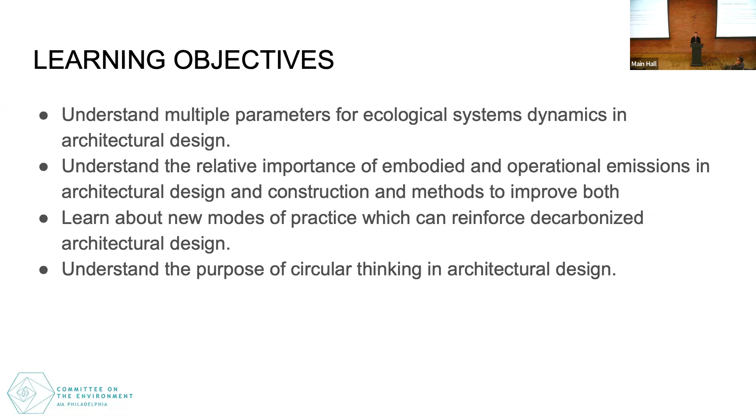The learning objectives for today are to understand multiple parameters for ecological systems, dynamics, and architectural design. Number two, understand the relative importance of embodied and operational emissions in architectural design and construction, and methods to improve both. Learn about new modes of practice which can reinforce decarbonized architectural design, and understand the purpose of circular thinking in architecture design.

Our presenter today, Timothy Locke, is a registered architect and management partner of OPAL Architects, a nationally recognized mid-size architectural firm in Belfast, Maine. OPAL is an acknowledged leader in sustainable, ecological, and high-performance building design, in both institutional and residential project typologies. OPAL has a reputation for integrating technology and innovation with energy and material lifecycle modeling. Furthermore, in 2019, OPAL Architects was one of 27 firms nationwide that met and exceeded the carbon emissions reduction target of the 2030 commitment.

In addition to his role at OPAL, Tim is heavily active in several AIA groups. He's on the board of directors for AIA Maine and co-chair of AIA Maine's Committee on the Environment. He also sits on the National Strategic Council as Maine's representative, has served on numerous juries, and has chaired the AIA National Zero Carbon Working Group. In his role as strategic counselor, Tim provided support and guidance to the White House Climate Policy Office as they released their new White House definition for zero emissions, which was also announced at last year's Greenbuild. Tim has traveled specifically down to Philly for this event, so please join me in giving him a warm welcome to Tim Locke.

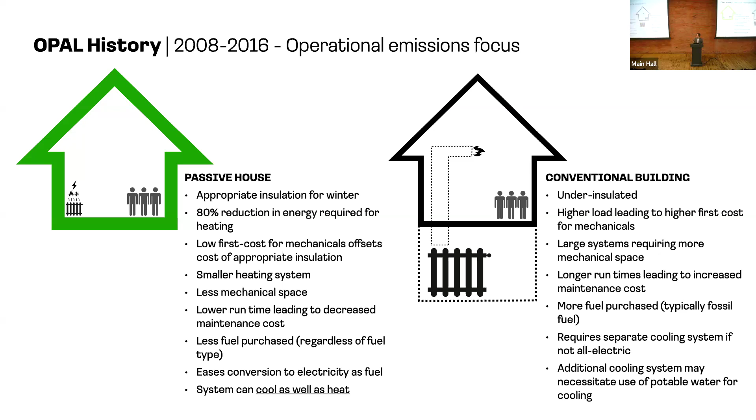Started with a really basic prototype. We actually got venture capital to build a passive house. This was the 12th passive house ever certified in the US, the first one in Maine, first one in all of New England. And we took a kind of outside the box approach to doing it. It's not very often that architects seek venture capital as though we were a startup.

This is how we did the first passive house. This was called the Go Home, back when we were still called GO Logic. We're not called that anymore. And that begat a kind of long lineage of small passive house typology buildings across the coast of Maine, New England, and beyond. We were kind of focusing on single family at that time.

I'm gonna try to go faster if I can, but we started to slowly adventure into different typologies. This is a lab that we did for University of Chicago about 10 years ago. We started to look at institutional buildings, things that were a little bit more difficult, but still applied the same paradigm to it.

The result of that, we can get to it. Slow slides, sorry. I'm really sorry about the lag here. I'm just trying to get it to catch up with where I am on my deck. You get to look at pretty pictures while we wait. Very sorry. Almost there, okay, here we go.

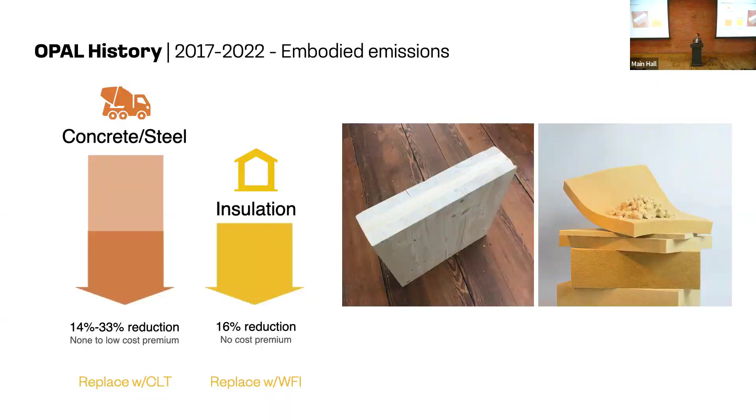We had to kind of expand into other territories. So about 5-6 years ago, 2017, we decided to take on full embodied emissions assessment in all of our projects. Could we take the same passive house approach of conservation to materials as well? That kind of led us to a turning point.

This is about 24 months ago, where I sat down and thought to myself, we're taking this piecemeal. But are we really looking at the whole picture of how we, as designers, are managing our system boundary?

One of my senior project managers had just finished his MBA at Sloan at MIT, and he was all excited about systems dynamics. I'm like, yeah, I wonder what we're doing on that as architects. Are we really asserting control over the system that we have control over, as in the design process for buildings?

I looked up this article that I try to read once every couple of years. It's a Donella Meadows article. She is a systems dynamics thinker, past at this point, and she has this amazing piece about places to intervene in a system. She's looking at any system - she was an environmentalist - but ranks these areas to intervene in a system from the least effective to the most effective. Twelve being the least effective, all the way down to one being the most effective.

It immediately struck a chord with me because I was picking up on these lines of inquiry that I knew were not working. So number 12, I've highlighted a few of them here: constants, parameters, and numbers such as subsidies, taxes, and standards. I was like, wow, we get frustrated all the time - like, why aren't the codes better? Why aren't our laws more stringent so we can do better buildings? I'm like, oh, it takes a really long time to change laws and we have no control over it. That's why it's a low level place to intervene.

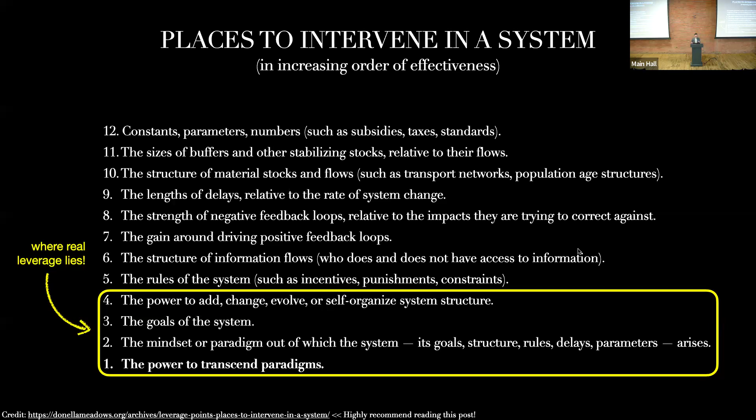I started realizing that the thing common to all of our practice in buildings was that we were operating in this area where we were just deciding to do things differently without asking permission. We were changing the system and self-organizing it around specific parameters like passive house or embodied emissions. We were changing the goals of the system, incentivizing ourselves to meet different targets than the discipline itself was choosing, and it was changing the mindset of our practice.

So developing a series of insights around that, working against the intuition and expanding our umbrella - that was the goal we had around this line of thinking in the last two years. So I'm going to share these insights with you. There's 8 of them, doesn't take too long.

First one is that our intuitions are often wrong. They're largely emotionally based - they still are great motivators, but first we need to ask ourselves what we actually know.

And I think the big one when we think about COTE, think about climate action, is this: save the planet. That is an intuition, that is not an insight. The planet is going to be just fine, the planet's gonna be okay. We're not gonna be fine, but the planet will be fine. So we need to think of ourselves as preservationists of humanity, of how we live on the planet, of the species that we interact with. The idea of saving the planet is a false intuition.

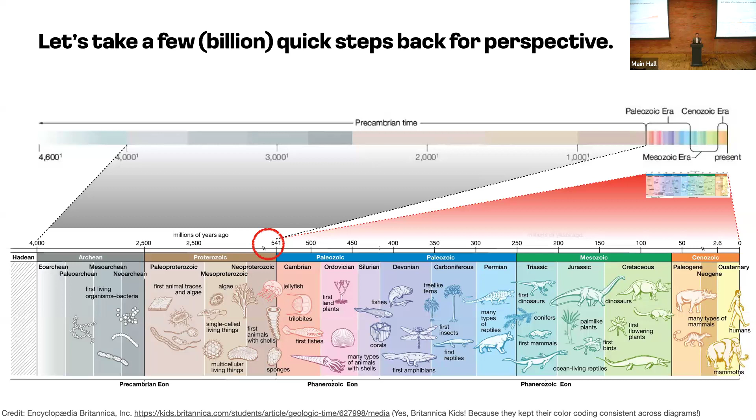We're really concerned about sea level rise, and we should be, because it affects us, it affects our habits, it affects the way we live. But we have to recognize that humans have lived through all of these conditions, and humans will continue to live through other conditions beyond where we are now. What we're trying to do is preserve that uncertainty, deal with that uncertainty. So climate change is about uncertainty, it's not necessarily about an existential crisis - so getting out of that mindset.

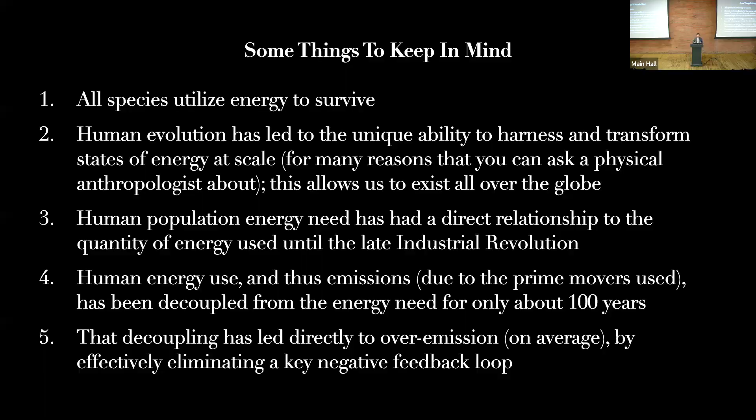That led us to this insight that an organization or civilization can only be sustainable if our renewable resources are used no faster than they regenerate, if disruptive pollution and waste are emitted no faster than they're broken down, and renewable resources have a timeline, non-renewable resources have a timeline to no longer be used at all.

It's pretty basic. We've got to use less stuff, period. We have to draw that down, whatever it is—energy, materials, no matter what. We're not great at that in the US. We use 5.1 Earth's worth of resources per person on average. We're not the worst, not even close, but it's nowhere near the one-to-one we need to be at to be sustainable.

I gotta hide this again.

We exist in a dynamic relationship with the natural world. This is our ecosystem. So we have a habit, especially in architecture—I think a lot of people know this picture, Laugier's primitive hut—of tying ourselves closely to humanity and thinking about architecture as a human intervention that's non-ecological, and then fretting about how ecological we can make our buildings. Well, we need to start thinking about them as part of our ecosystem.

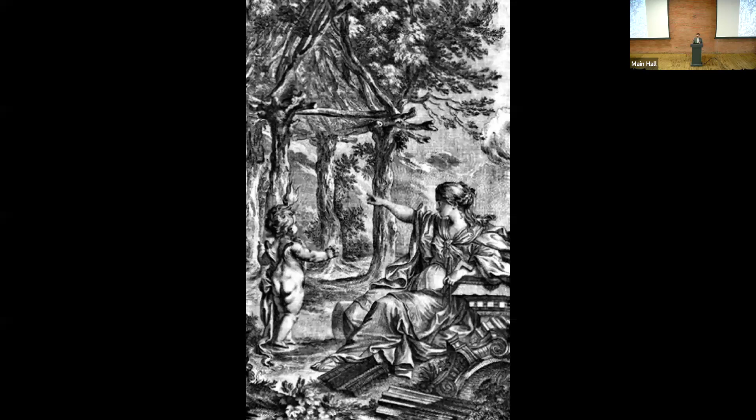Our ecosystem is all this stuff. It's all drawn from natural resources. We're not harvesting other planets. And so thinking about these things as separate is really just about idealism versus materialism.

We're trying to think about things as material at OPAL, always measure and calculate what those impacts are. And that definitely changes how we think about a building.

What's the limit of a building? We used to think about buildings as ending at four walls, and I think many people still think about them that way. It's pretty common now that we think about energy—energy comes in, waste, heat, and emissions come out. I think that 20 years of work on energy has kind of cemented that as core to most people's understanding of what a building does.

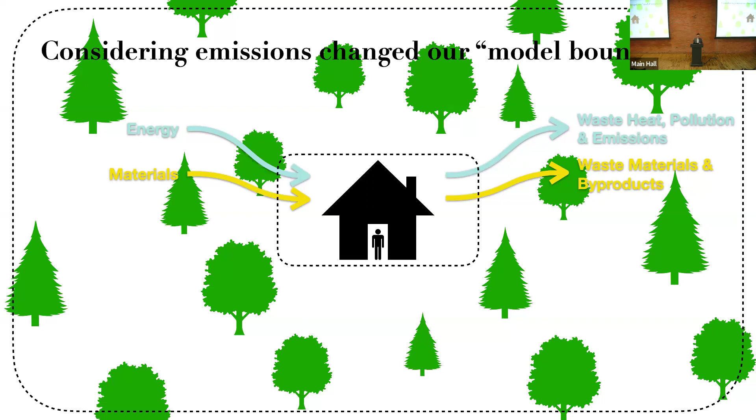But that boundary is quite tight. The first thing, considering total emissions—we already talked about that—changed our model boundaries a little bit. Now materials were part of that equation. Waste and byproducts of those materials, be it through demolition or replacement, were also part of that equation. But we still didn't see that as holistic enough if we're thinking about just using less stuff.

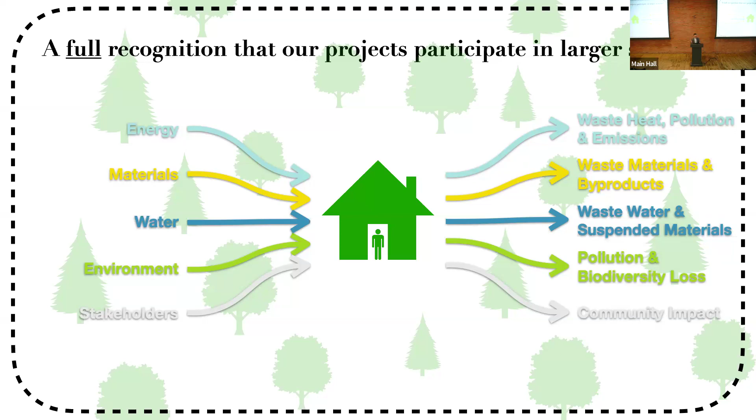So we were trying to look for a full recognition beyond just emissions that all of our projects participate in. We thought about energy, materials, water, the environment or ecosystem, and stakeholders—us. We're part of the ecosystem too, again, not editing us out. And those had different byproducts: waste and materials, water, wastewater, suspended materials, pollution, biodiversity loss, and community impact. We started thinking about our system as these five boundaries.

Once we'd established that, we were starting to really consider side effects pretty heavily. And again, there's no such thing as side effects, just effects that are outside of our thinking at the moment. We tend to be, as humans, pretty good open loop thinkers.

We can have a goal, we make decisions around the goal, that changes the state of the system we're in. Closed loop thinking is a little bit beyond that—it's like what we try to teach kids. You do these things, you learn from that change in the state of the system, and it might make you make a different decision next time.

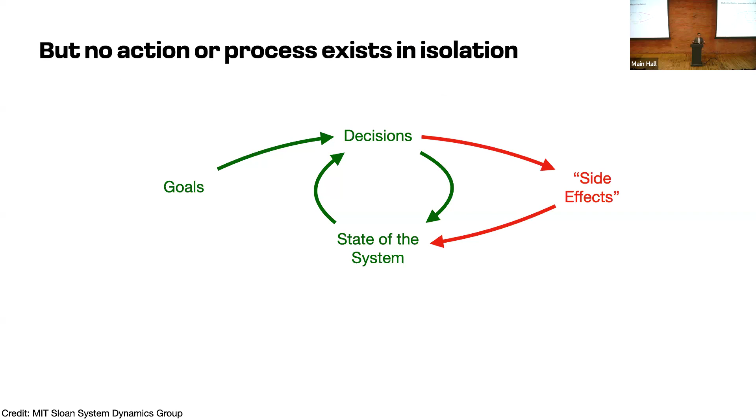But that's still not considering the side effects—what are the things that happen because of the decisions you make that are outside of your control? You deal with that a lot in life cycle analysis modeling or life cycle assessment modeling, relating that to energy. How do those things push and pull on each other? How are they not kept separate?

And then the thing I like to think about a lot is the other agents. There's a mirror of this diagram—there are people acting on the same system, an adversary to you, and they have their own set of goals that they consider equally important, with their own set of side effects. I like to go through this all the time, like the six potential opponents. I've made up six—I'm sure there are more—but I've categorized them as six to paradigm shifts.

We've all been on this list. 100% we've all been on this list. I know I've been on this list. It's important to just know that's out there, because they're all that mirror side of those system dynamics. There's the deniers—they're the ones that are in the news.

They have cultural hurdles and habitual hurdles to a shift to change. Resistant to change, there's plenty of people we know, practitioners, whose business as usual is working just fine for them for now. I'm not going to change. Hesitant to change, that's a fear response.

Governance structures, folks interested in maintaining their power, and a change in that system might affect that. Stakeholder allies, those have a potential financial burden with the change.

And then peer allies, this is the most interesting one in a group of architects or building professionals. We've all been peer allies to each other at one point or another, I'm sure, because of our own hierarchy of expertise, and trying to break those things down is really important, and understand that sometimes that's just an education and communication gap. And we don't want to use that list of potential adversaries to make an attribution error, to kind of start blaming other people in the system for things that we can control.

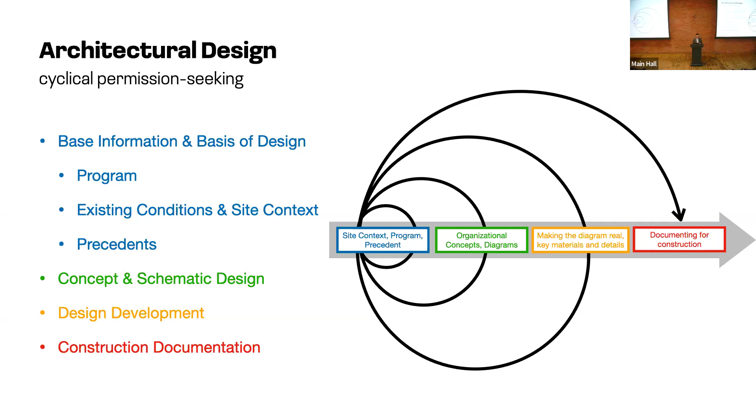And it was like, this is wild. If you were trying to permission seek on all these, you'd never get anything done. But you still have to model them, right? And I have to manage all that data.

And it got me thinking that, you know, we do all this modeling, but all our models are inherently wrong. They're fake. They're virtual models of something that we think will happen. We do the best we can. But really what I had to get people to do was ignore that giant, messy periodic table of criteria and think about a mental model about using less and doing more, being more impactful by doing that.

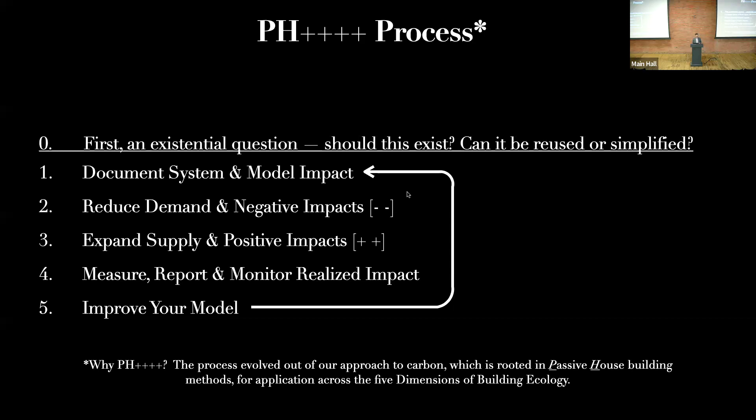The easy analogy here is: use less energy before you put the PV on the building, because you have much more effect of using less before you add more. Then we measure and report even after the building's open, use that to improve the model, cycle it back through, and do that across as many things as we can.

That allowed us to really break open the practice. We changed our name to OPAL six years ago, and we immediately realized that even an architectural practice founded around that idea wasn't enough. So now we have two sister companies that grew to leverage that idea across everything we'd consider the domain of something the architect could control.

So we have OPAL, not just doing architecture but doing holistic ecological consulting. We have Timber HP, making wood fiber insulation in Maine out of wood residuals from Maine sawmills, or any sawmills in New England—we'll buy your chips, doesn't matter where. And OPAL Build, which does mass timber component fabrication. All of a sudden we had a way to leverage experience and control of systems across components, materials, and advocacy.

I'm going to quickly give a brief description of each, and then we'll look at a couple of projects that synthesize those things together. First, starting with the holistic ecological consulting.

A lot of that's what I've been talking about already. It started with just taking that mess of a periodic table. We put together a building ecology squad—not just me, but George, Gabe, Dan, Karina, and Julia. Thank you so much, they did so much work on this over the course of 18 months.

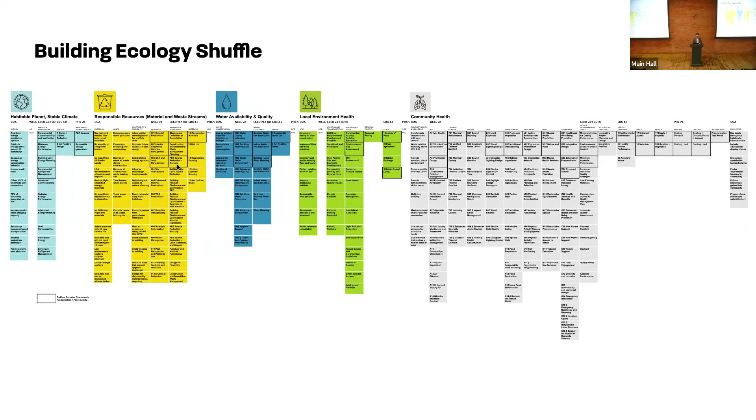We started by taking that crazy periodic table and sorting it into our five categories—the five categories of streams coming into the building. It's arbitrary, but we can make our own systems, right? We sorted them into these five categories. Still too much. Then we broke them down into things we actually thought the architect had direct control over on every project. Even this is too small.

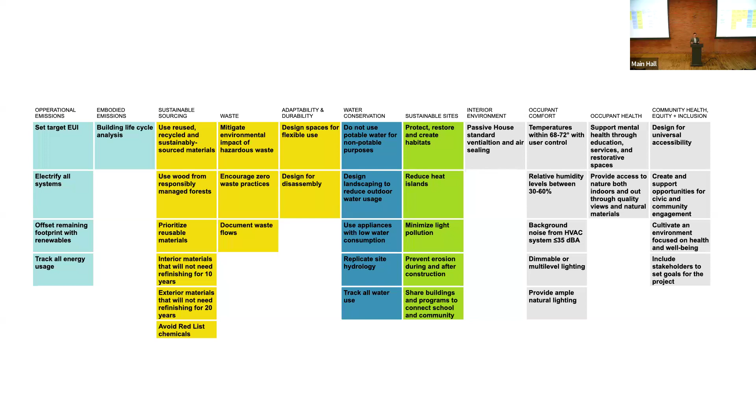I'm not even going to read them, because I wanted this distilled into things that actually have a design impact I can see, so it can be appealing to an owner, to a client. That was our dimensions of building ecology—that's how we consult, around this framework we developed internally.

We sorted it based on the scale of community affected. At the top, habitable planet, because it affects the entire globe. All the way at the bottom, healthy community, because it affects your stakeholders and their immediate community.

What we found when we did this was that the number of cohorts—especially in institutional projects, non-residential projects, larger projects—that found a way in through things that weren't building emissions up at the top was vast. Most people come in through the bottom, and that's fine. We all know these are interrelated, but they didn't need to know that. It was a chance for them to learn something, and it was exciting for everybody.

We sorted it into three key items in each category. As I said, I wanted them to have direct, visible design impact—something you could see with a design response, so there could be a social comparison, back to that idea of the cool factor. Then we put it together in a way that was digestible, always cluing in when it triggered another category.

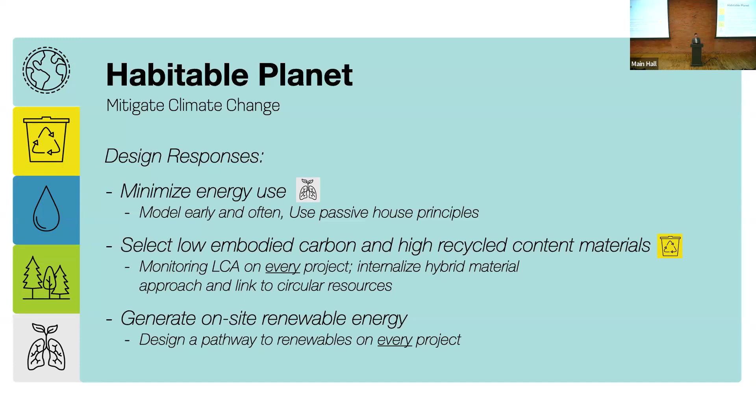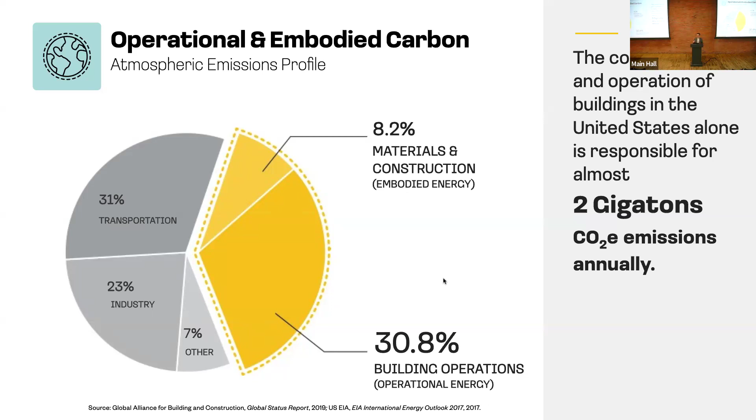So if we're minimizing energy use and not using fossil fuels, then we're going to have cleaner air in the building, which affects the community health part. People could start learning how things were interconnected as we went through it. Habitable Planet was obviously the first one—the one we're most experienced with, and still hierarchically probably most critical with buildings, because 40% of all global emissions come from the things that we do. They're the byproduct of our scope 3 emissions as architects.

I always like to do this when we travel—understand the difference of climate, because it changes everywhere we go. So standing here in Philly, you have a much less aggressively cold climate than we do, but more cooling, and a slightly dirtier, by about a third, energy profile. What it results in is actually a pretty similar opportunity, whether it's here or in Maine: reducing operational emissions is a significant way to reduce total emissions.

Pennsylvania's approach is driven more by the way you produce energy. Ours is driven more by the need for energy, but they come out pretty close to each other in the end.

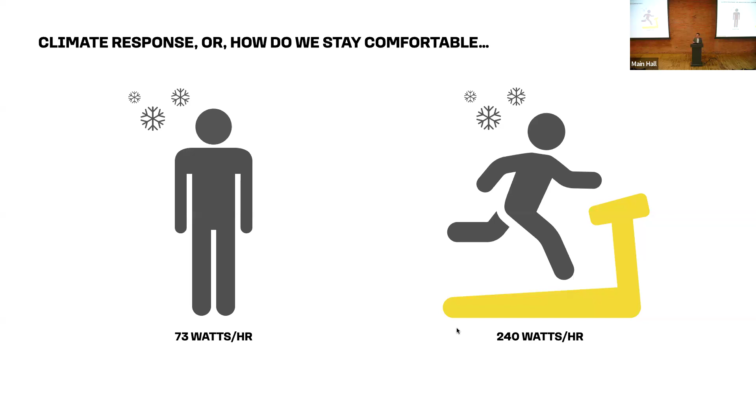So climate response is just staying comfortable, right? Like if we're standing outside in the cold, one way to stay comfortable is I can produce 240 watts an hour. I don't know if there's any other runners in the room, but I can read that now on apps or on my watch. I can tell that I'm warm. I can wear way less clothes if I'm outside. If I'm standing still, I'm going to be cold. But there's a pretty easy way to deal with that.

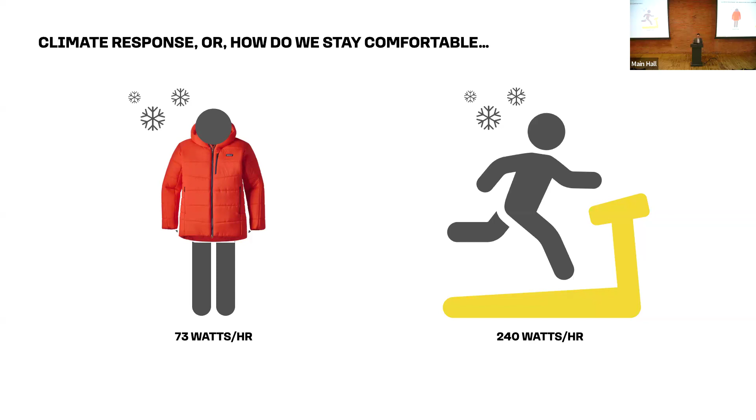We can all wear a passive house every day just by wearing the right jacket. That's that passive house. But if you continue to run, maybe you break your knee, maybe you're going to be pretty angry pretty quickly, and your body's going to break down.

And basically throughout northern North America, that's what we've been asking our buildings to do. This here on the right, basically for all of modernity, that's what we've been doing ever since we decoupled energy from population. A hundred years ago, we've been asking our buildings to do that. No wonder they break down and they have to get replaced. No wonder we're replacing our mechanical systems every 25 years.

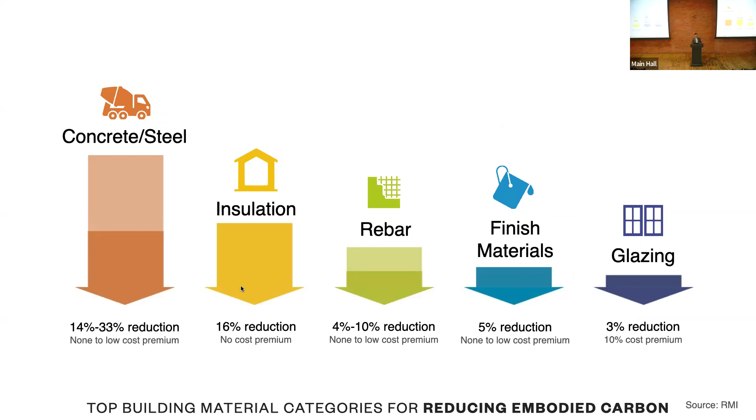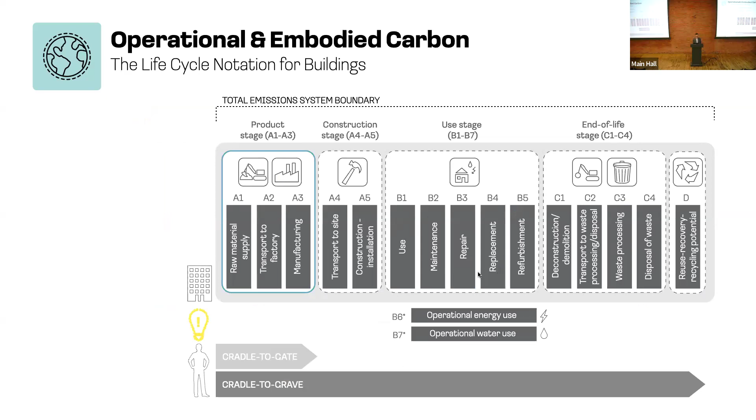We also want to look at embodied emissions, of course, reduce what we can, focusing mainly on insulation, concrete, and steel, because they're the biggest contributors across most life cycle assessments. Looking very specifically about total emissions, trying to be inclusive and exhaustive, we've recently, in the last year or so, started adding modules to this, like refrigerants and mechanical systems, into our total emissions boundary on that habitable climate section.

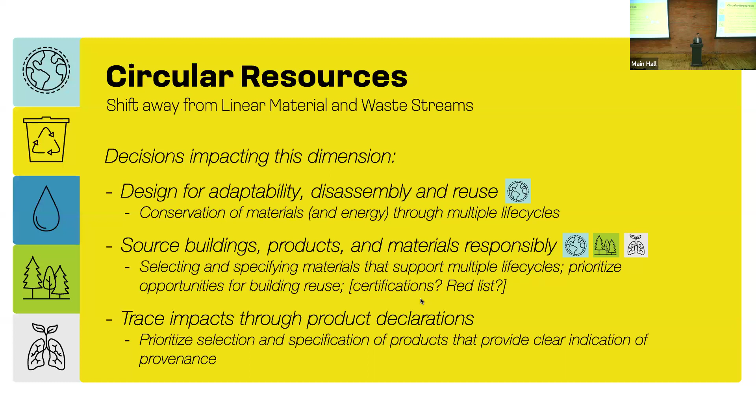Circular resource is something that I've become really interested in lately as well. The benefits potentially in reducing emissions by being circular, by designing for adaptability, by sourcing buildings and products responsibly, and by tracing impacts. This comes largely out of the Ellen MacArthur Foundation thinking about circularity. But I love this little graphic. This is actually something that a colleague of mine at Rocky Mountain Institute shared with me when we did a lecture together a few months back, that I thought was just brilliant.

If we really want to be circular as designers, we're going to have to think really hard about the way we design. The reason I'm so interested in circularity right now is because it has the potential to change the design paradigm.

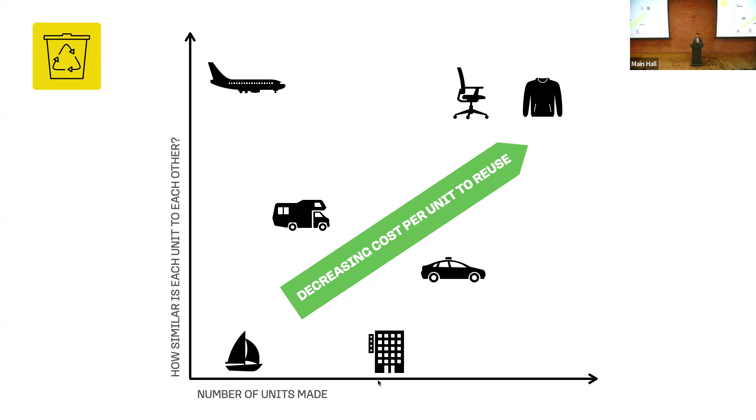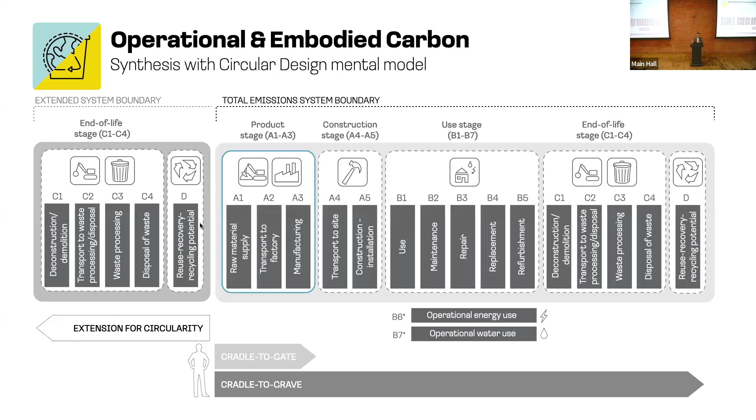Well, people that are thinking circular are not only going all the way to the end of life, but they're already going back into a past life of a previous building and thinking about essentially, I mean, I'm not trying to be glib, a multiverse of buildings, imagining these multiple lifespans of buildings overlapping each other constantly. And it's really interesting because it's basically taking this thing that we all know as practitioners and turning it on its head to this thing where everything's interconnected. The demolition of a building can feed directly into the construction of another one.

When you start thinking about that way, to allow that to happen easily, some things start to trigger, like, maybe we don't want bearing walls in buildings because that means we have to take them all the way down if we want to change the space. Maybe we want really regular and long spans as often as possible because it makes things more flexible, which means the propensity for it being torn down is lower.

New questions. We talk about water use, and also just our conceptions of what we think about as zero water. And are we actually doing that, or are we changing the dynamics of the hydrology of our regions in ways that we can't walk back from?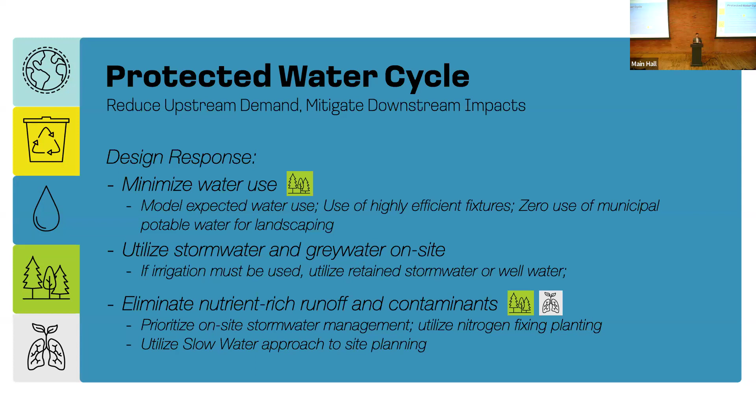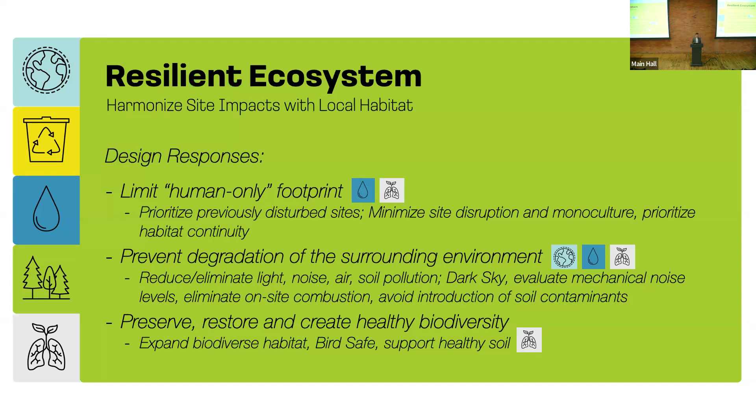Resilient ecosystems - we want to always limit the human-only footprint as much as possible. We've started calling it that. So that means it's not just the building that's human-only, but also lawn, driveways, things like that, and trying to minimize that as much as possible. We've had the luxury with some projects on the coast of Maine where we can do that. We can build buildings on tiny piers that don't actually affect the surface at all, and the biodiversity can stay much higher.

That's not the case everywhere, and ecosystems are different everywhere, and that has to be acknowledged. And then healthy community - that's the one I think most people know well, even as stakeholders, and they know what they want out of those buildings. We had an opportunity of doing a project, we'll look at it later, where their entire reason for doing the project was just about making their campus ADA accessible. We were able to do this really confined building to make that happen and still meet their emissions goals as well.

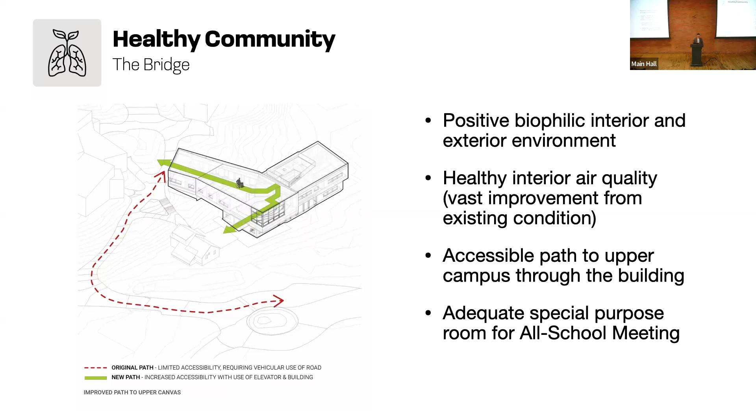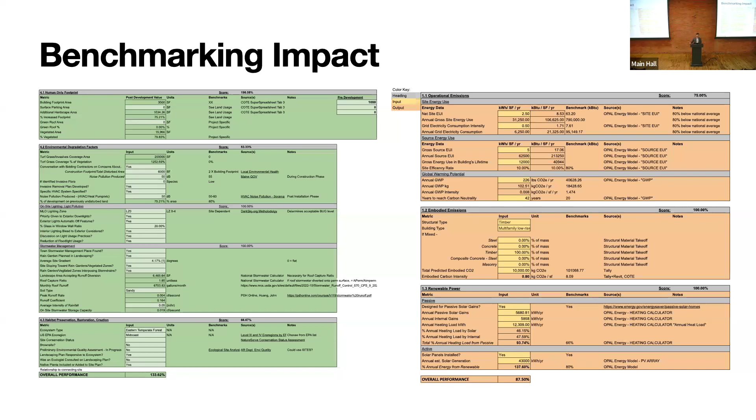So we put this all together and we have a benchmarking tool. We built this in-house. It uses a lot of inputs and formulas from other tools. We're trying to always reference that within our tool, like when people need to use other ones to fill it out, but it's a way to set benchmarks for the office. Since Passive House had always set its goal of 80% energy reduction, we're like, can we get to 80% reduction in use across all 5 of those categories? I don't know yet. We've only been doing this for about a year. So far, we haven't done a building yet that got to 80% in all 5 of them, but we'll try, just keep trying it.

And then this also means advocating. It means being here today with you. It means working with the White House on policy. It means starting things just off the cuff. We started a Maine Mass Timber Collective just last month through our COTE chapter to try to raise the baseline standards of care for biogenic structures, not waiting to be told that there's a set point by the industry, but setting it ourselves. So that's for consulting.

We're also making wood fiber insulation. So we did a crazy thing like 6 years ago where we bought an old paper mill and we bought a bunch of wood fiber insulation making equipment from Germany, in a plant that was closing down because they were transitioning to making MDF for IKEA. They'd gotten a big contract.

Well, it turns out that you make wood fiber insulation the same way you make MDF, you just don't press it as hard. And it also turns out that as we start to super insulate more and more buildings around the country, people need a lot of insulation. And this became quite quickly a really exciting business proposition for a lot of investors.

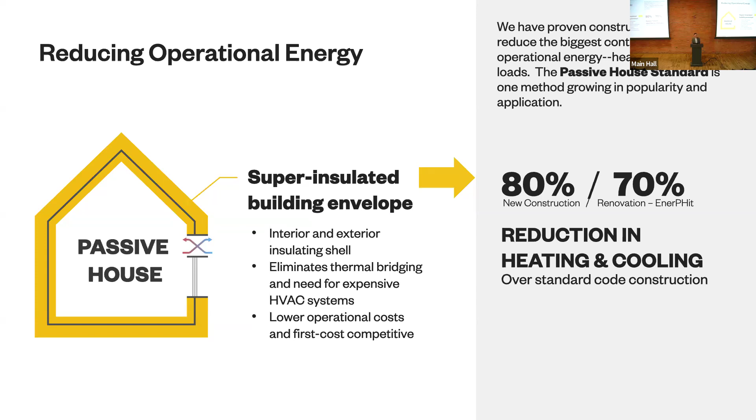And all of a sudden, there we were trying to design a factory, which we learned immediately we should not be doing. We thought we could, and we can't. But the potential was huge in reducing that embodied carbon because the insulation products that are available on the market are quite high in embodied emissions, and there wasn't really any good, readily available and readily scalable biogenic solutions.

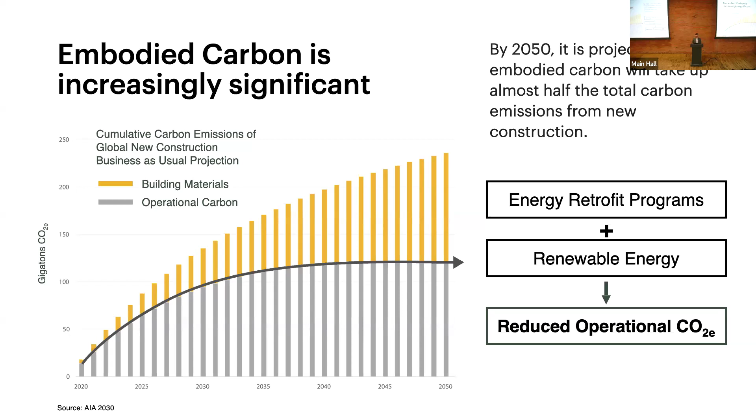Measuring A1 through A3 on embodied emissions, it's the only insulation product that can show a negative. We do include biogenic carbon - we can talk about that after potentially. I know there's a lot of debate about whether it should be included or not. I think we would advocate that it should, not just because of TimberHP, but for a lot of reasons. It's a waste product too, like it fits in with that circularity. So when a sawmill makes lumber out of a log, there's a lot of chips.

We call them residuals. If they pile up at a sawmill—we have a lot of sawmills in Maine—it can shut that sawmill down in 3 days if no one buys them. No one's buying them for paper anymore, or very few people are. So if there's a waste stream that can be put to good use and also store carbon in a building, that's a pretty exciting opportunity, and it helps us revive our forest economy.

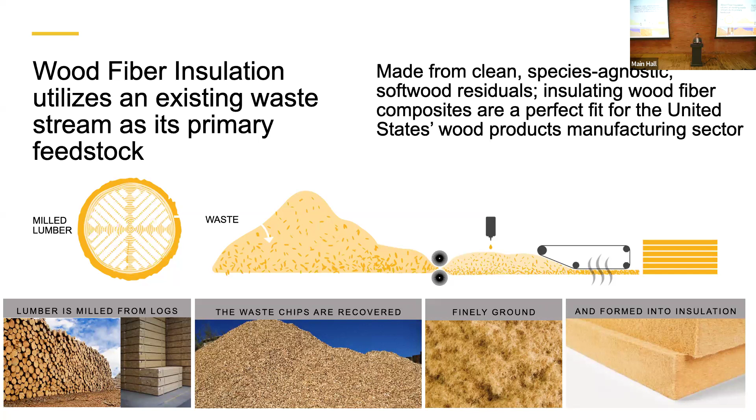With the decline of paper production, those wood baskets are kind of going unused, and we have different problems in different areas. In New England, it's the potential closure of family-owned sawmills. On the West Coast, it's topped trees that can't be used for lumber sitting in forests and starting forest fires. There's different problems in different regions, and there are also untapped regions that don't have the forestry industry they once did.

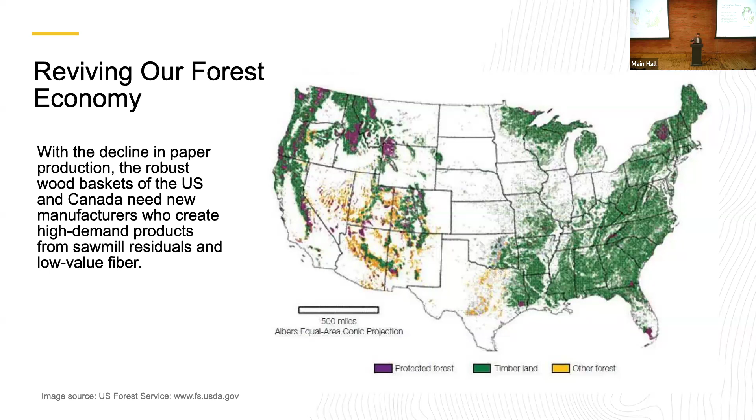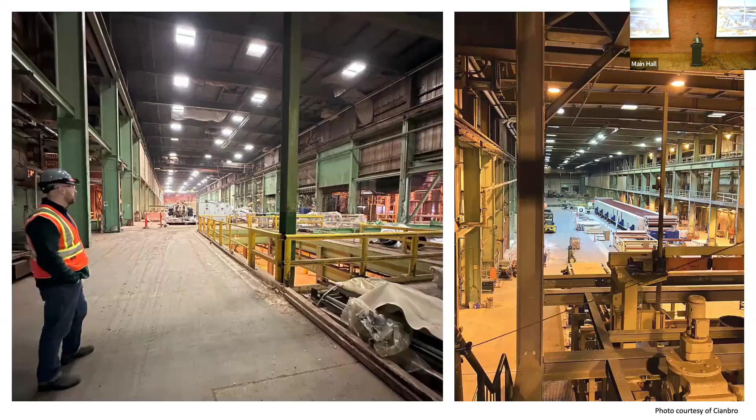Here's a view of the inside of the first production line getting installed. It allows us to create wall systems that can save considerable amounts of CO2 in A1 through A3 over mineral wool, which was the product we'd been using most extensively before that.

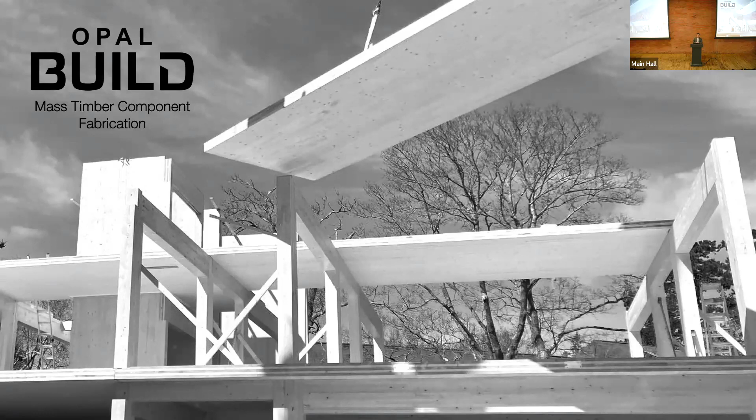We also created a mass timber component fabrication shop—this is in Belfast as well. The insulation plant is in central Maine. As we started to realize there was going to be this market for insulation and this extreme interest in biogenic materials for structure—mass timber, CLT and glulams—why not start a component shop that could combine the two?

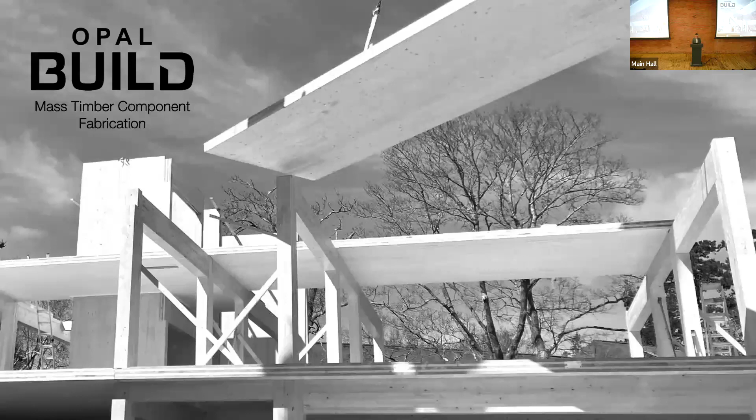This is only about 2.5 to 3 years old, but they've already erected a full CLT point-loaded building—that's this building here, we'll look at it later. They've also done an erection of a completely panelized all-wood wall system from a crane on a barge. This was a site that was inaccessible by road.

It's a field research station with a flowing seawater lab in it, studying marine life that exists in this one location in Penobscot Bay in the entire world—a specific type of scallop. Because of that, it's completely off-grid. The Science Foundation is completely off-grid, no cars. All their energy is produced on the island.

And how do you build a building that way? Well, there's two ways. You can deliver a bunch of sticks to the shore and put it together with a screw gun, or you can fabricate all these panels in the shop and crane them into place. This took 2 weeks to put the entire thing together, instead of a crew having to live on the island the entire summer. So it saved them time.

And they also got this super cool CLT and mass timber all-wood panel. Here's some roof panels going in—that's a 3.5-inch, 3-ply CLT panel with 14 inches of wood fiber insulation laminated to it. The lamination happens in the shop in Belfast, and then it gets craned into place by the crew. Wall panels have slightly less insulation, but essentially you're getting a passive house level building, all CLT, all wood.

Simple building. We love simple buildings for case studies because there's a really good chance people actually do them. Don't try to break the wheel and also make the most complicated structure at the same time, because there's a high likelihood the building never gets built.

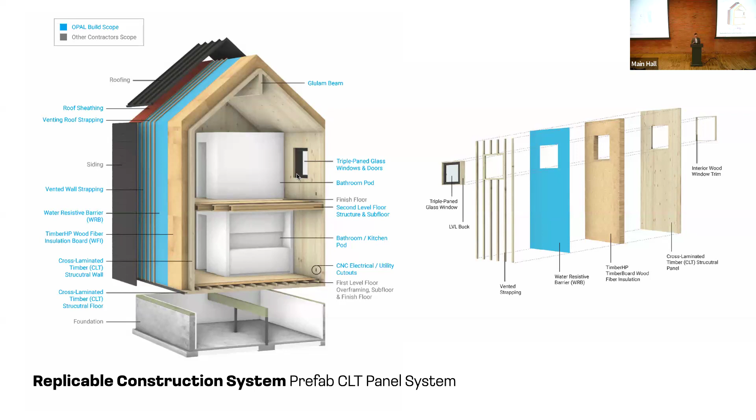All mass timber, all wood fiber. And we can also use it for other components, like retrofit window installs for deep energy retrofits. There's a big need for that across the country, especially if we're looking to be more circular. We need to find ways to use carbon storing materials for those retrofits and not just put a lot of foam on our buildings.

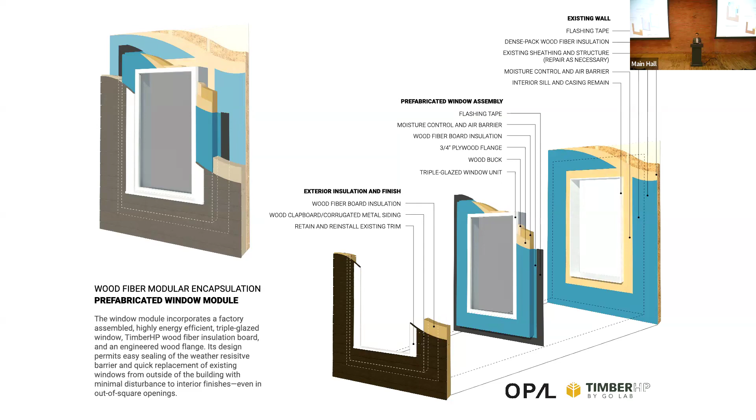So then we get to synthesizing that. We want to synthesize all three of those approaches together into architecture, because I was telling Roshni beforehand, I'm still just an architect. I like to think about these things, like to pretend to be a bit of a theorist now and then, but I still spend most of my day just doing architecture, and I love it. So I'm always interested in how do we take what we're learning and make it into something more.

I'm just going to share three projects quickly. The first is a school that we finished during the pandemic for the Waring School in Beverly, Mass, about 20 minutes outside of Boston. This school came to us with this really serious problem. They had no space. They have this all-school meeting every day. It's a private high school, and they were stuffing their entire student body into this room. There was so much CO2 buildup in the room that people were literally falling asleep.

They didn't even realize that was the problem they were trying to solve. They asked us to solve an ADA issue and that they really wanted to be the first certified passive house school in Massachusetts. And then we go to this meeting and we're seeing kids fall asleep in front of our eyes. Like, well, we're going to solve this problem with another method for you. Getting fresh air into the building, getting properly sized spaces are going to solve it for you.

They had this pretty significant grade issue, 11 feet between lower campus and upper campus. And the only way a wheelchair bound participant could get from the entry court to upper campus was literally to be driven, even though it was probably only 150 feet horizontally from one location to the other.

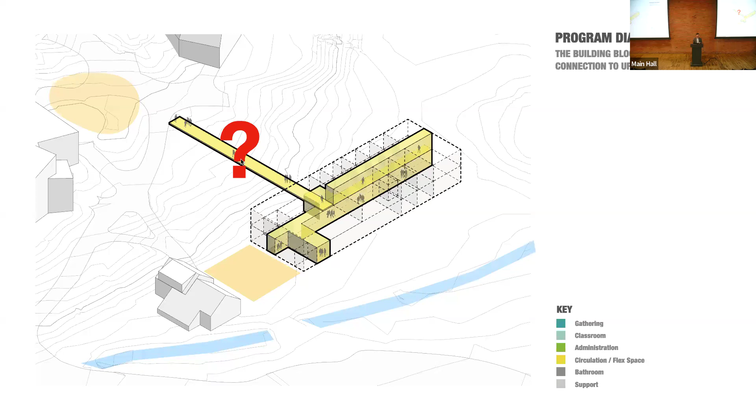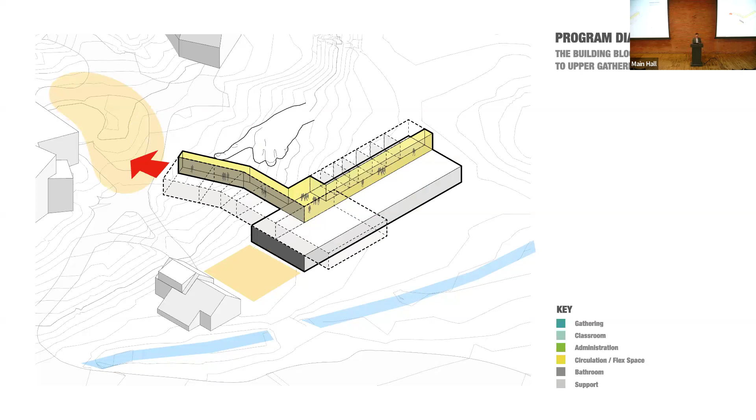We're like, we'll get you your passive house and we'll let the building be the bridge and we'll figure it out. It's not going to be a cube, but we've learned it doesn't have to be a cube all the time and we can still hit the number. So we used the building as the bridge. The second floor of the building became the thing that got those participants from that lower court to the upper court, completely enclosed, completely covered, very easy, accessible. And we were able to, somehow still not totally sure how, get the energy levels down low enough to meet that passive house goal.

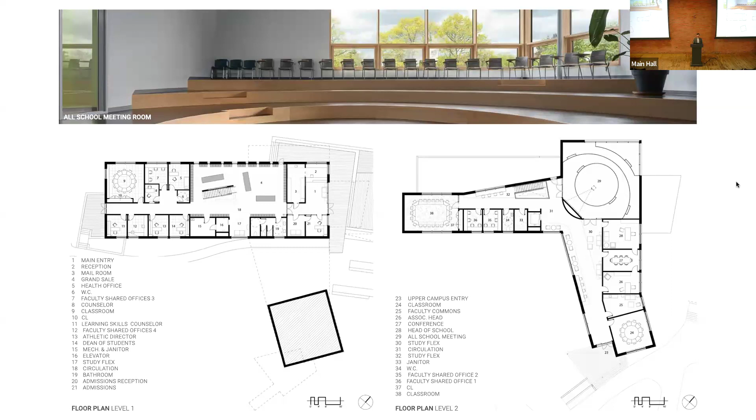The building had to be very contorted and convoluted to get around all the trees. We're trying to avoid a very restrictive covenant within Massachusetts about tree removal, which we fully supported, but it was also incredibly difficult. So some of the building's angles and contortions were just about missing some very, very large eastern white pines. You can see them through the window right there. So the bridge extends out, we had to snake past through those trees. Somehow our builder was able to do that without damaging any of those trees, which is amazing.

And we did this all for $325 a square foot too. So certified passive house, solve those problems, low cost, by investing in the parts of the building that they needed to make those things happen and not in other parts.

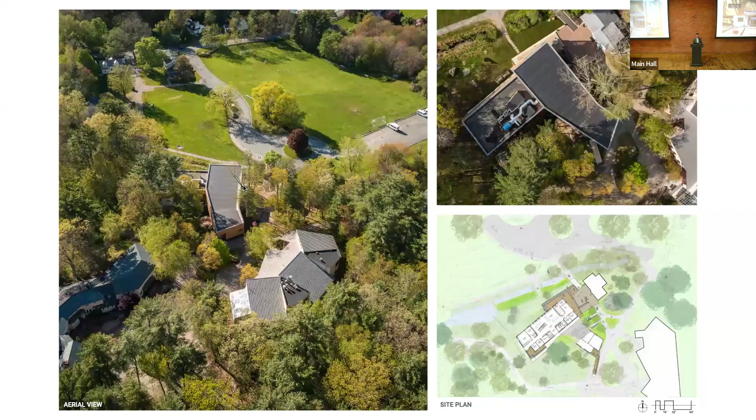Here you can kind of see back under the bridge. You can see from these aerials how that form takes shape, trying to get it through those trees, sculpting through there down to the lower court.

And all of a sudden they could breathe in their all-school meeting room. They had this new room that was the right size, completely supplied with 100% fresh air, with full energy recovery, passive house certified ventilation system. Because we knew this room always had to house the whole school, we didn't have to super increase the ventilation values, because we could just move the ventilation from serving the classrooms to serving this room as occupants move around the building, which was exciting, so they didn't end up with two duplicate systems.

The total modeled site EUI on that building was 5.7 kBtu per square foot per year. Typical educational EUI, I don't know what the average is now, but probably around 70-75 for K-12. Measured after one year, we always want to go back and make sure we're measuring it. After one year, we were at 8, so a little above, but still well below passive house threshold, which was our target. We're still waiting on the final paperwork from Germany on the certification, but the design has been approved. There's a couple construction details they're still approving in Germany, but exciting project.

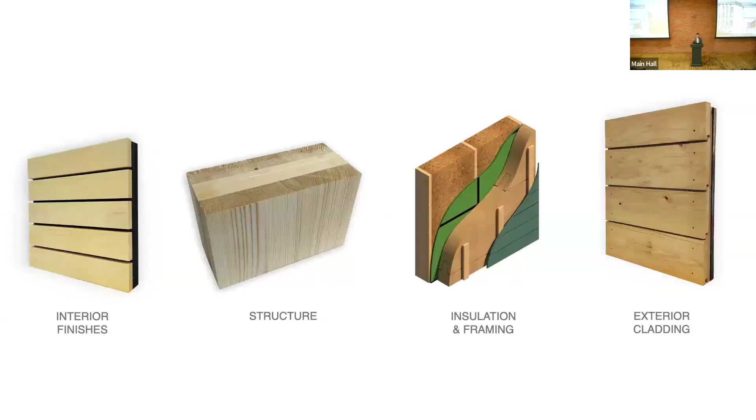This was way back in 2018. We couldn't source full CLT, but we could do glulams and the full wood wall system we'd looked at earlier. They also had really aggressive standards around habitat, so they were an early case study project for Ornilux bird-safe glass, used throughout the project.

They also had really, really aggressive stormwater standards, which you can't even see, but it was amazing. There's no public stormwater in Bar Harbor, so we had to deal with that no matter what. It was an exciting challenge.

The other big thing with this project is they had two rooms that go above hospital level in air changes per hour. They have a marine mammal dissection lab right here. Hospitals usually are in the neighborhood of 6 to 7 air changes per hour. Marine mammals, because of potential pathogens and dead mammals, require 12 air changes per hour.

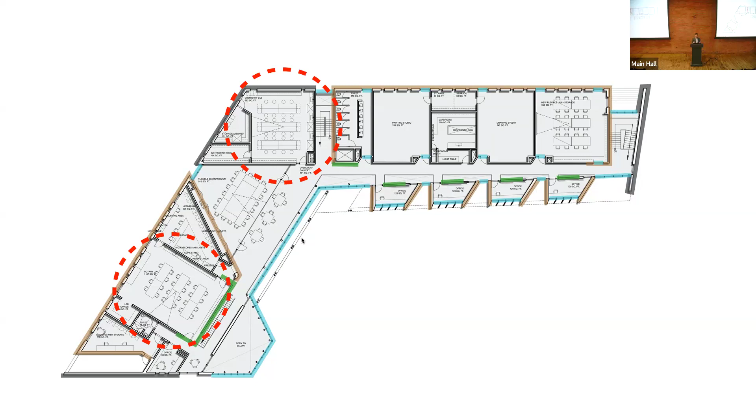When we saw that, we needed a system that could ramp that high and still serve general classrooms, because they also had a drawing studio with just a normal open classroom, a GIS lab with just a bunch of computers, and a printmaking studio with chemicals requiring very high air changes per hour. We needed a system that could do all that and still perform at passive house level, since that was their energy use goal.

When we did the modeling, the ventilation system alone was 40% of their energy loss. Usually, even with 100% fresh outdoor air, we're in the neighborhood of 25-30%. This was enormous. So we worked with a mechanical engineer, Van Zelm out of Connecticut, to custom design that giant DOAS ERV and custom design the enthalpy wheel to try to get something efficient across all those different modulations.

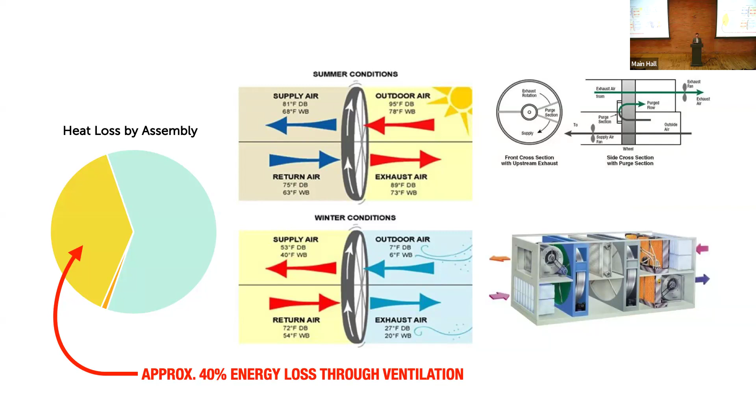The bird-safe glazing was a really exciting product to start using as well. We've now looked at that on a couple projects with them; we'll see a different version of that later. Getting a commercial contractor used to building a school at this scale entirely in wood was a pretty significant challenge too. I think eventually they got into it, but at first they were pretty wary of not having a steel erector on site at all.

Just some images of the building.

We're like, trust me, the amount of air that you're taking out of this room is already high enough. You don't need a vent right at the tanks, and you don't need it to go outside. We want to use that heat, temper it, filter it, and use it to heat the rest of the building. She's like, no, I know I need it. I know I need it.

So what we did was we just took one of the return air ducts and custom built a little hood. It still goes into the ERV, but now there's a boost switch that she feels like she can hear, the fan's going higher. And so everybody was happy.

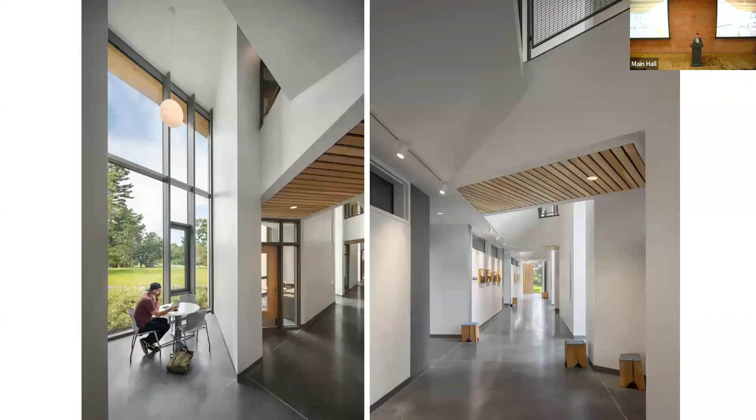It was great. But just some views down the hallway, again, trying to lean into the wood wherever we can on the project. All these stools were made by the college president from a white pine that had to get removed during construction. He hand carved the names of all the donors, and myself and Susie, into each one of the stools. So everybody has their stool in the building. That helped make the building such a really nice thing, kind of a cool little side thing.

This, I think, is like the nicest bathroom in Maine. If you're ever in Bar Harbor, you can send me an email and we can go look at it. It's really nice. And we were able to hit their targets on EUI. Their goal was 24 kBtu per square foot per year. We got it to 11.

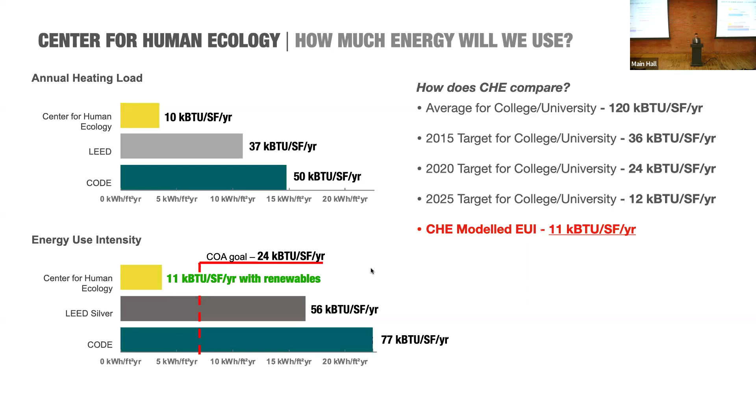They were having this long debate about the night bus, about whether they should buy an electrified night bus. And what we were able to show them is, you can do that, it's great, you should. But also, by the way, the deferred emissions would allow you to run the same night bus you have for 355 years. So maybe let's consider where we're putting our investment. And that was a fun day for them.

Again, we try to measure this one as well. This one actually has come in, after a year of operations, under our model, the EUI—so we're at 10 kBtu per square foot per year—on an academic building that has collegiate labs, collegiate printmaking, a chemistry lab, a zoology lab within the building. So this is a real lesson for us, that those passive house approaches are possible. Those low embodied emissions are possible in any building type, no matter what convention is.

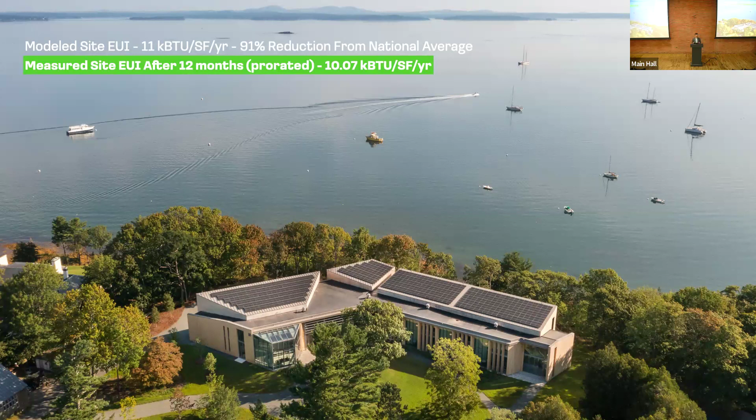So the last one I'm going to share is a second building that we're just finishing now for College of the Atlantic, that I call Lifespan. It's a dorm. Right after we finished that building, literally a week after, we did the ribbon cutting at Convocation—this was in 2021 for the building you just saw. The college president calls me—I don't know, for those of you who do residential architecture, sometimes you have a client that gets done with their project and they just want to do another project because they just love it, they just love doing it. And Darron calls me, he's like, I want to do another building.

And I'm like, really? We just finished. He's like, yeah, but I want to do all the things we couldn't do in the other one, because we couldn't buy the stuff yet. And I was like, all right, let's do it. This one wasn't a collaboration, and it was on this crazy tight site.

The interesting thing about College of the Atlantic is that it's 8 old vacation properties from the turn of the 1900s that they bought. So there are all these footprints of buildings that used to be, and the outbuildings and accessory bits of human imprint that used to be.

The site they chose was completely within a tennis court that used to be there. The ground had been leveled, a previously disturbed site. The challenge was, can you fit this entire building within the limits of that old tennis court? You could only see the residuals of it, they weren't still playing tennis there, it's from 100 years ago.

So it's a very compact building, but it allowed us to try something interesting I was interested in, around creating a building that could potentially see another life as a non-residential building. They wanted to do all mass timber. Unlike the other one that was a hybrid, they wanted to go full CLT on this.

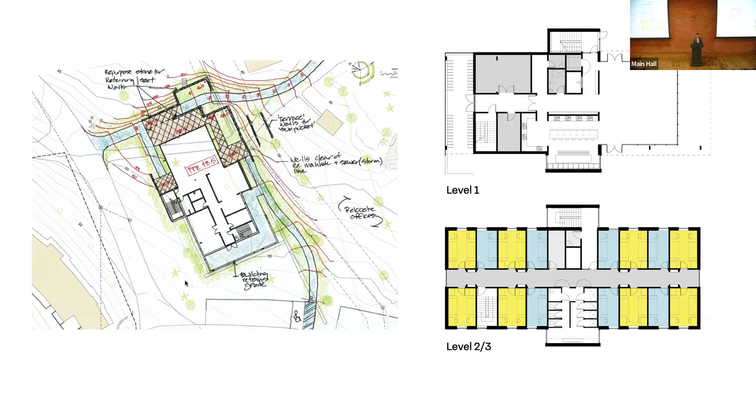So we developed a layout that would be conducive to potential reuse, no bearing walls, all glue lam posts with CLT spanning across multiple bays. Obviously dormitory typology is really conducive for that, but I wanted the potential for all those demising walls to at some point be knocked down, to use the building as something else if you had to. So CLT was like thinking about Maison Domino, but with glue lams and CLT. That was kind of what I was trying to instill into our structural engineer, Thornton Tomasetti.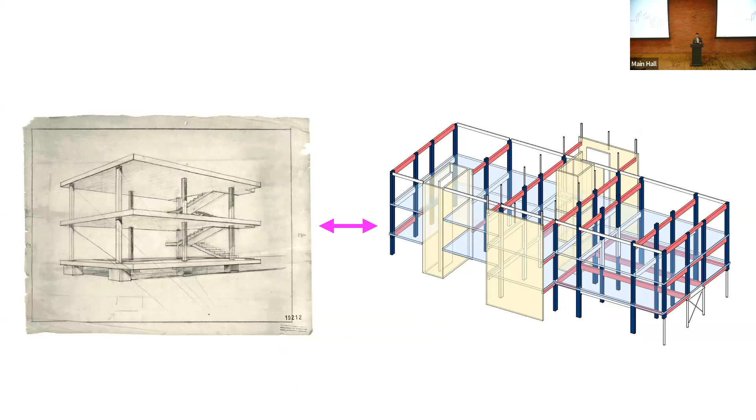We're kind of inventing a lot of these fasteners, because if any of you have done mass timber projects, you know we're at toddler phase right now. Everybody wants to do it, it's on every project, it's so popular, but a lot of these details don't exist. Even for basic layouts, like the most basic glulam layout you could possibly do, if this were a steel building I'm sure they could have detailed it in a week, but all of these details had to be custom drawn, custom fabricated. This is the hurdle for mass timber. So everybody who's super excited about mass timber, understand that. And it is in the process of getting built into your cost, trust me, it's an issue. Even with insurance, people are getting wise to this being a fad, so warning.

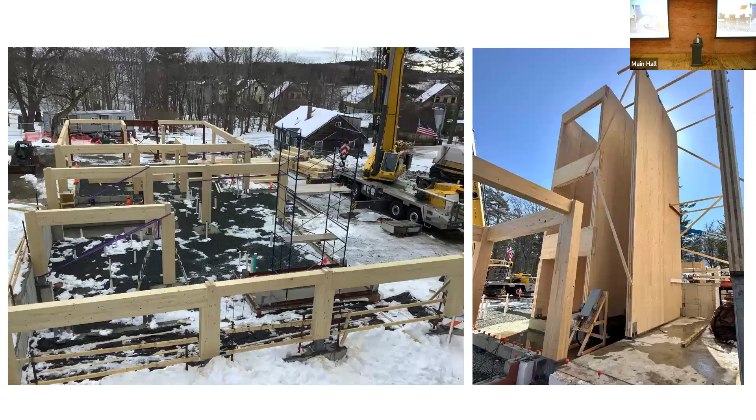So here's our layout. As I said, OPAL Build did the erection of this building. We tried to go out to other competitors, but the only people that even responded to the ask from the construction manager to install the CLT were steel fabricators, and then all of them disappeared when they actually needed to provide a proposal. So only OPAL Build was able to do it in our region, and they put this entire building up in 3 weeks.

The mass timber came from Austria, in this case KLH, and got delivered in shipping containers. The erection of the mass timber took 3 weeks to top out. It's a 3-story building, and they spent another 3 weeks on site just installing the roof trusses. That's the difference between these large systems that can be craned into place versus the way we typically think of wood construction. Here's the crew, special shout out to Dave Miller, our site superintendent.

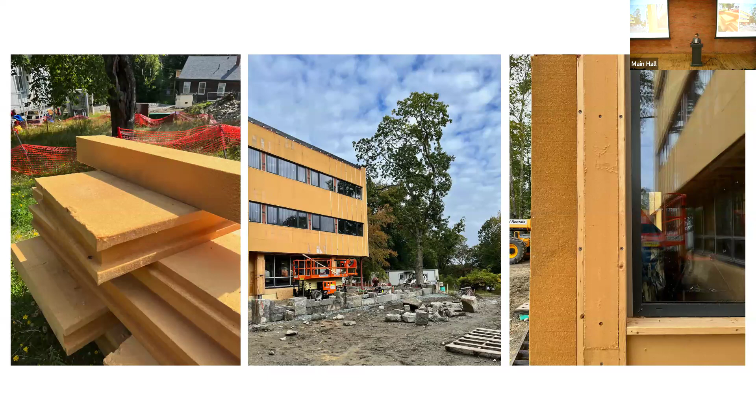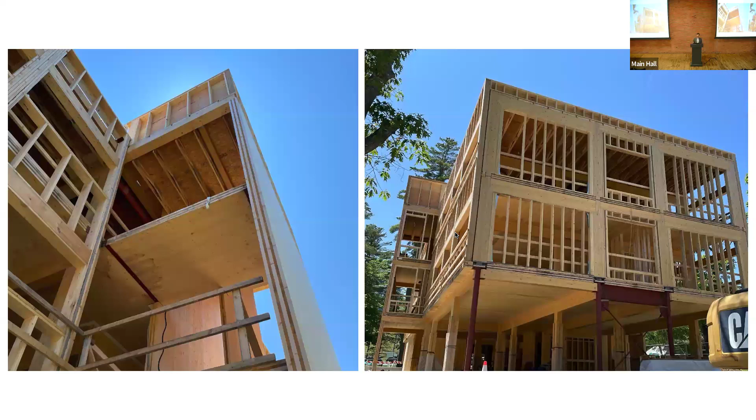All wood fiber insulation - in this case, because Timber HP had made it a certain way down their production line, we were able to use Timber HP in this building. So all the blown-in insulation in the wall cavity is wood fiber insulation from Timber HP. The rigid board, which will be available from Timber HP later this summer, is from our German partner, who's also an investment partner in the factory project. All wood fiber had this nice burnt umber look for a while, and we had to invent a bunch of deflection details for wood, which don't exist either - a big delegated design bill in the middle of the project, which takes a client that's really invested in those types of case studies in order to achieve.

We also always want to go back and measure, as we do, and almost done. So we typically start, and I'm sure a lot of you do too with your life cycle assessments, by looking at just the construction assemblies.

What we found out quickly is that if we're looking at an all mass timber building, that red dashed line, the negative we're achieving through biogenic reduction in module A, is still completely offset by the deconstruction in module C, and the lack of availability to send that material into another life cycle in module D.

So we're still kind of in toddler phase with these materials. For this to actually become zero carbon, I'd say we need an aftermarket use like we have for steel or concrete, but for wood. We don't really have that now. 86% of wood gets incinerated or landfilled, not reused. That's why you get these bigger chunks in those modules.

We were surprised. I had the structural engineer actually design a CLT and steel hybrid, and a steel and concrete structure as well, because I wanted to model them against each other. The total savings of the all mass timber building versus the steel and concrete building wasn't huge, about 40,000 kg CO2.

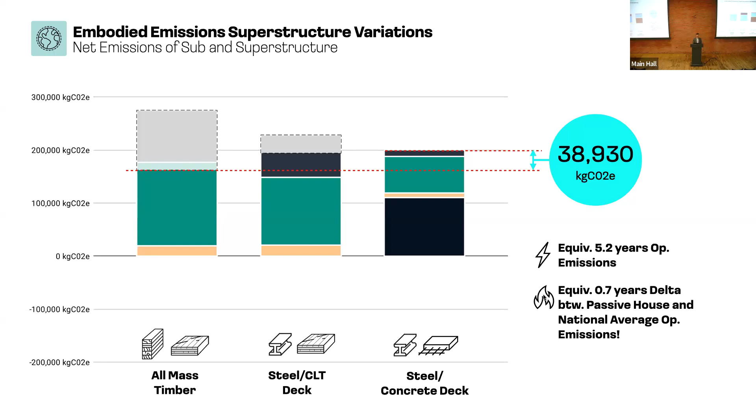B6 is the module we use to measure operational energy. So at passive house performance, at 60 years, which is the boundary of this measurement, it was still over 50%, even with a super low energy building. You can see how that deduction gets smaller and smaller each time.

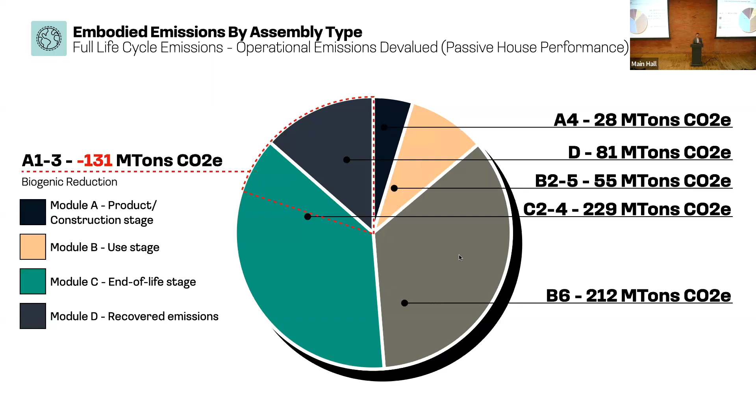Some colleagues around the country have said, 'but Tim, you've got to make sure you're understanding the emissions will get devalued because the grid's decarbonizing.' So I put a 3% compounding deduction on the emissions from B6. It's still over a third at 60 years. And this is a passive house, mind you. If I do all those things but use a conventional building with normal energy use, it's 84%.

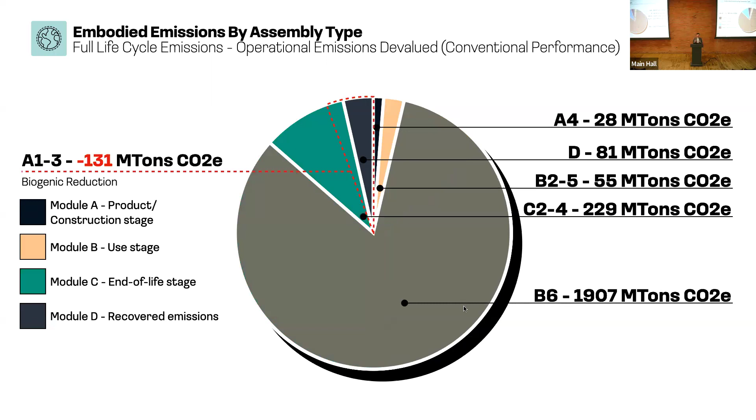So please don't get distracted by how excited everyone is about zero embodied emissions. We will get there at some point. It's important work, I'm part of that work nationally, part of that work with the White House, but it's a very small portion of the overall impact of the building.

And that's even before we start looking at more advanced things like MEP and refrigerants. We started measuring that too, and in this building I did that as well.

Once I add in MEP and refrigerants for a normal building, assuming passive house level energy performance but a normal refrigerant and heating/cooling layout, that leads to a certain amount of MEP that was over a quarter of the pie. All of a sudden that typical boundary of just the assemblies was only 50% of it. The rest was operations, refrigerant, and MEP.

So the mechanical engineer and I had this idea: could we use less stuff with the MEP system? He said, 'do you think I could get a custom refrigerant coil and just shove it in the ERV?' I said I didn't know, call Ventacity, who was making the passive house certified ERV for us, and ask if it'll fit. It did fit. We got the custom coil designed.

That allowed us to put the condenser right next to the ERV and reduce the volume of refrigerant by 80%. So we took passive house all the way down to refrigerant.

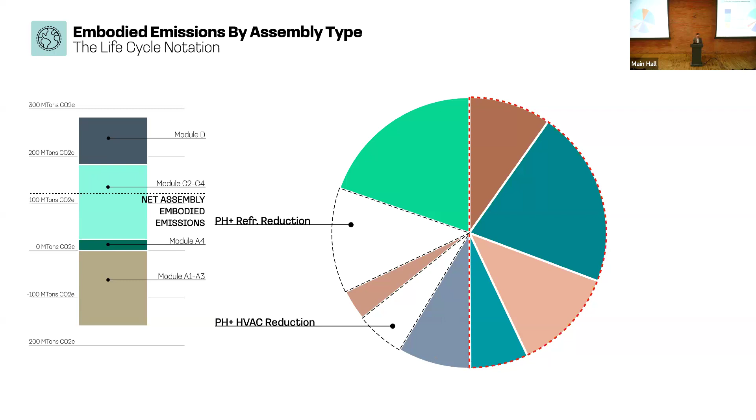We were able to pay back the total emissions in 63 years of overproduction of energy. If we exclude module D and just assume we don't know what's going to happen, that's 45 years. I like to say if a building's truly carbon positive, it needs to do it within its usable lifespan. That varies by typology, but a dorm building on a college campus we'd expect to be a 100-year building, so we feel good that this building is actually reducing emissions over its life.

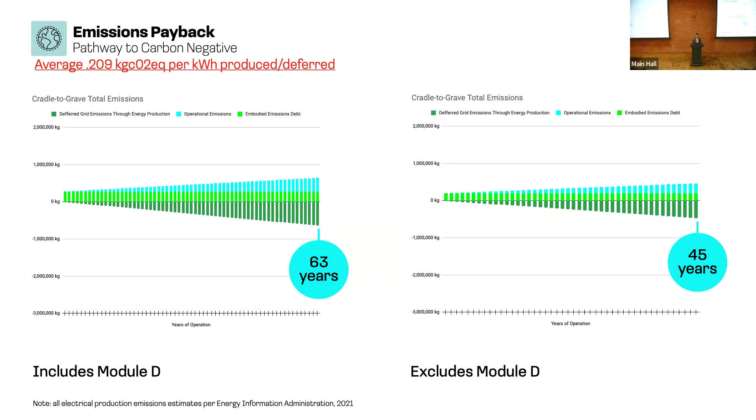If we didn't have passive house, we couldn't fit that PV on the roof — it would take 3 roofs to do it. That's important because we can't count on always being able to use other land for our renewables, whether it's PV or not, because eventually that's out of our control. We always want to see a pathway on the building itself. Again, if it was a national average conventional assembly, that would never pay back on the building — impossible.

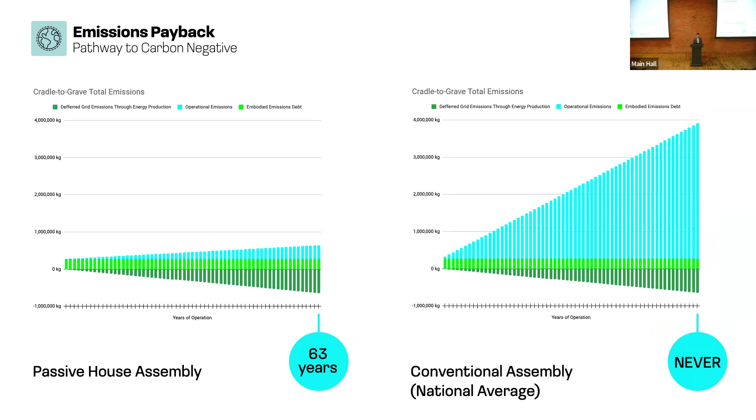Just to leave you with some last pictures — it's also been a good test case. This building's not open yet, it actually opens next week, so I don't have any pretty photos yet, but...

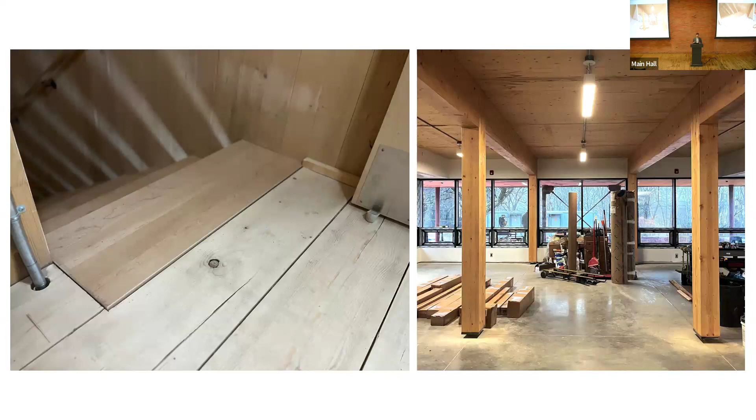Ways to finish CLT in mass timber, that's all new — how do you do that? We have different examples in this building: some places we just drywalled and painted it, some locations we left raw, some we clear-coated or added finishes to. But it's about normalizing a different aesthetic. Again, they haven't moved in yet — it's a very different aesthetic than a normal building.

And just some photos of the exterior as we leave. We did benchmark this in our framework, and it did really well in all categories except for protected water cycle. That had a lot to do with the town not allowing us to treat our wastewater on site. But it's interesting always to measure it and see how things work out.

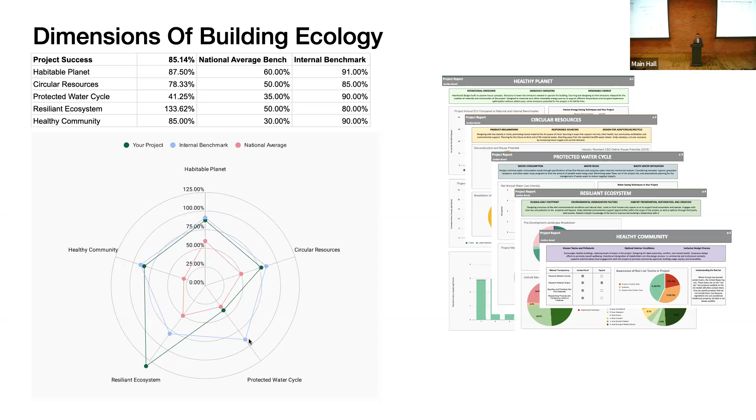I'm just going to leave you with this last quote: the problems of the world are increasingly complex, but the solutions remain embarrassingly simple. I have some time for questions. I'm really happy you had me here today. Thank you.

Apparently, somebody might monitor the Zoom.

I'm working on the project right now, using CLT materials, so I have a lot of questions I'll probably ask you later. But where are you getting your lumber for your CLT panels? What I discovered is that the majority of good lumber for CLT panels comes from Central Europe.

So in your model, do you include all the emissions it takes to transport your wood from Europe to the United States? Absolutely, yeah, we do. We know enough about how to customize the way we manage our LCAs, our life cycle assessments, to make adjustments if we see something's off.

Hey, everybody. Rob Fleming here, past president of Philadelphia AIA and currently working at the University of Pennsylvania. What an amazing lecture, Tim. This is why we're here at the AIA, and the work that the Committee on the Environment is doing is spectacular. Congratulations to Roshni and Catherine and the whole team for putting this together.